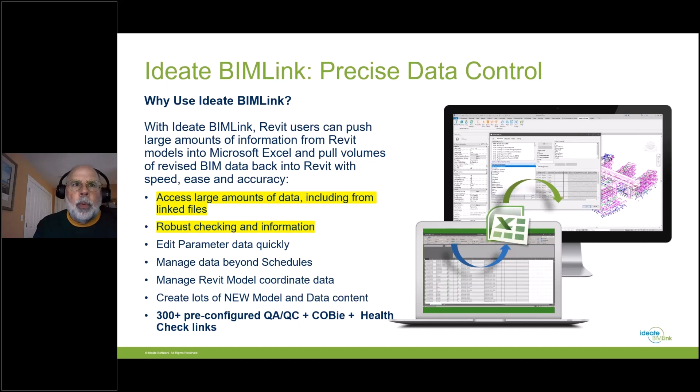So let's move right on to the products. Today we're going to be focusing on Revit model health and data management. Our first solution is called Ideate BIM Link. BIM Link supports many workflows, but today I'm really going to be talking about the highlighted ones here: robust checking and information and large amounts of data. We ship with multiple link definitions that allow you to extract information from the Revit model.

So here I'm going to go ahead and start Ideate BIM Link. This happens to be Revit 2023, but we support multiple Revit versions. When I select new, I have a series of link definitions that are already defined. In this case, I'm going to select from the health check folder. I've got something called HC views. These properties about the views, for instance the view template, the view count, the schedule type, are already predefined. I'm now going to export that out to an Excel worksheet that we also include with Ideate BIM Link, called our health check file.

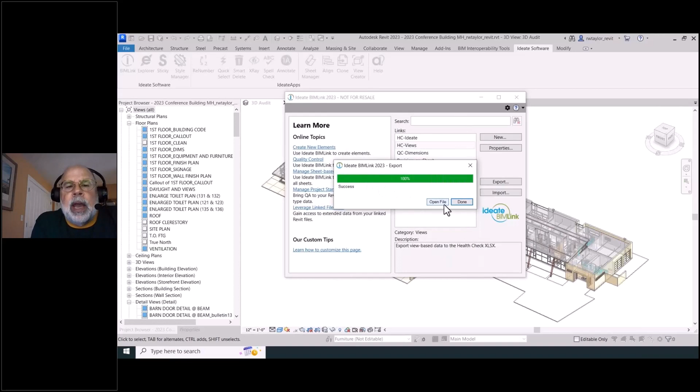So I'm going to export that. You can see now I can open up the file. I have what I call the raw data from Ideate BIM Link that's been exported: the view name, the title on sheet, the view template, all those parameters we talked about. But we also create a summary. Using pivot tables within Excel, we create a nice summary of all the different views and view types. We're going to see how this Excel folder can actually be expanded on with Ideate Automation.

For the time being, though, right now I want to show you just some editing. I'm going to hide some of the columns here that I don't need. Column D is the view name, and I'm going to use another column here, basically AT, and create a formula in Excel. That's the great thing about Excel, is I can concatenate data, I can add information. So I basically say I want this to be uppercase, all of the view names, and I want it to have a prefix of CONF for conference. Once I get the formula the way I want, I can basically use Excel to pull down the data, and then I'm going to apply the values to column D, which is the live BIM Link data, or the raw data from BIM Link.

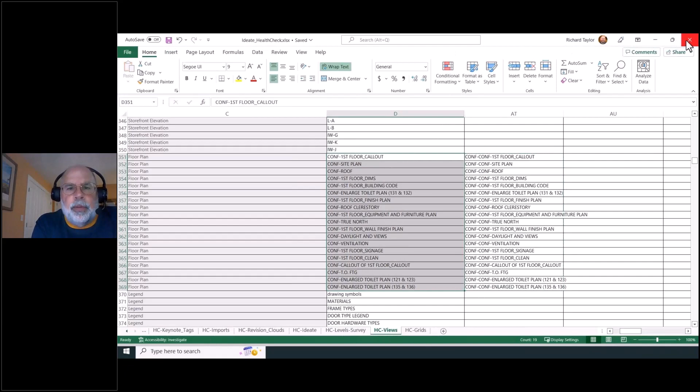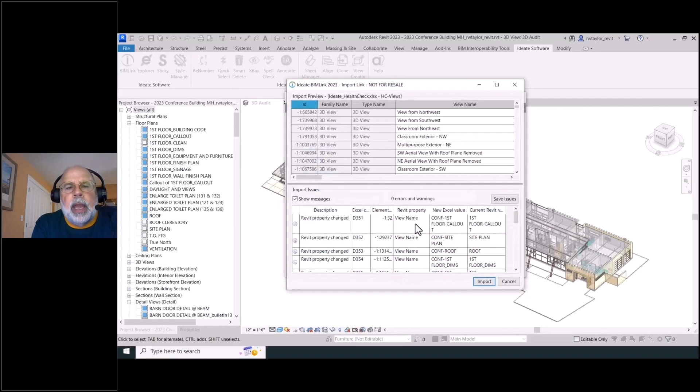Now that I have updated column D, I'm going to do the reverse process, which is basically take the health check Excel file and take that tab, which is the view tab, and import the data. So I'm going to import that from HC health check views, and I'm importing it, and now the information has been updated. So notice over on the project browser now, all of the plan views have been updated to be uppercase, as well as have a prefix of CONF. So I just wanted to show you a quick round trip example using Ideate BIM Link. And again, we're going to expand on that in a moment.

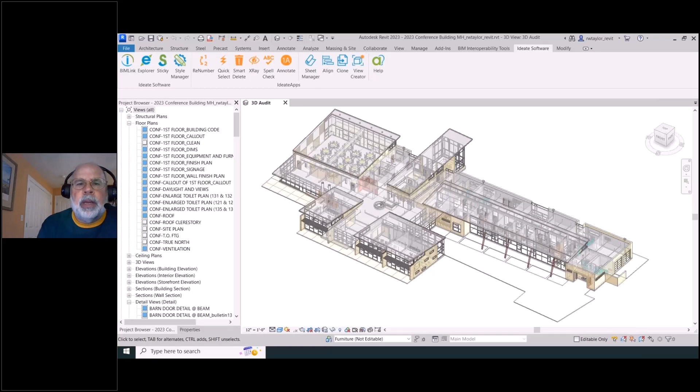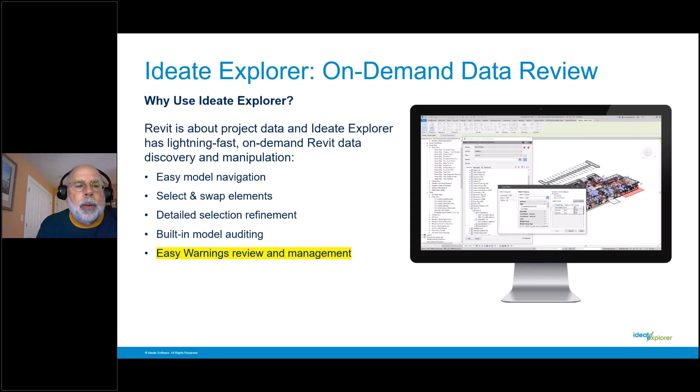Our next solution is called Ideate Explorer. As I mentioned, it's our model browser. There are so many workflows, but I don't have time to explain all of them, so I want to talk about warnings. Ideate Explorer allows you to review every single element in the Revit model, but it also allows you to review warnings. This is critical for a health check. When we do automation, we're going to be using the data here.

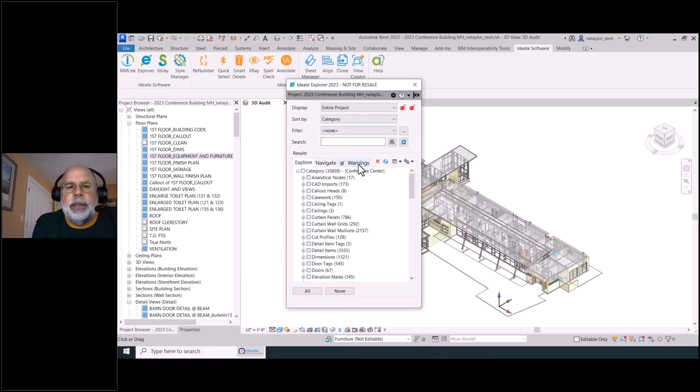So I just wanted to show you that you can switch over here to the entire project. You can look at the warnings tab, and this is going to show you the warnings, whether they're ranked high, medium, or low. You can also choose to have a warnings threshold, which we're going to talk about also on the health check. So I basically said that this file is allowed one megabyte, or one warning per one megabyte of file.

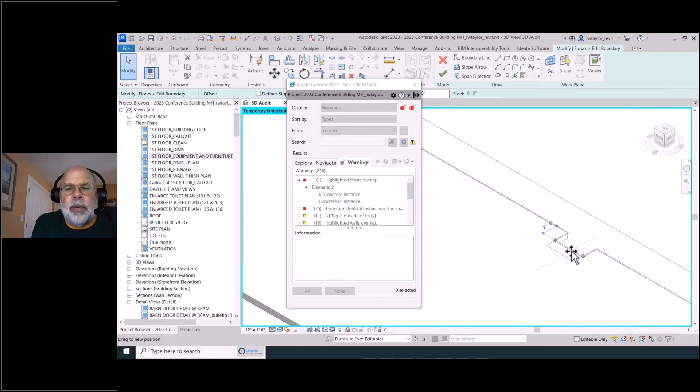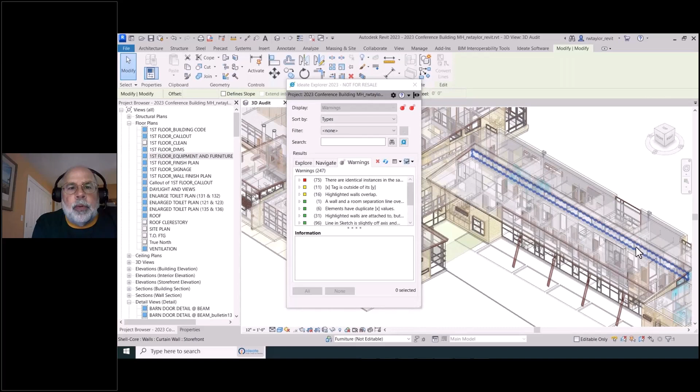But in this case, I'm just using the interactive tools within Revit to be able to highlight the two floor slabs that conflict, and then I'm going to change their boundaries so they're not conflicting anymore, and then that is no longer a Revit warning. That warning has gone away within my dialog here. So Ideate Explorer allows you to review those warnings and be able to fix them very easily.

Ideate Apps, as I said, is primarily productivity and efficiency, but there's a new tool that we just introduced in June called Ideate Annotate. Ideate Annotate allows you to review and check annotations on sheets and views.

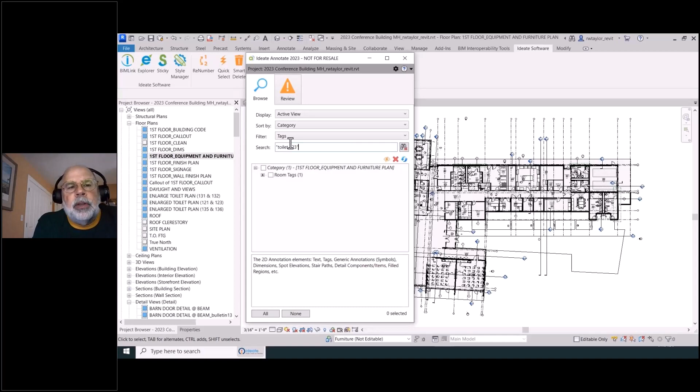So if I go to the Ideate Annotate tool here, similar to what you just saw with Ideate Explorer, I can browse elements, but in this case I'm only browsing 2D annotative elements on the view, or I could say the entire sheet or a number of views and sheets. I'm going to search for a particular tag, the toilet 123, and there's the room tag.

I can double click and go right to the view that contains that particular tag, so I can review or browse the information. And I think the bigger task at hand is to review clashes.

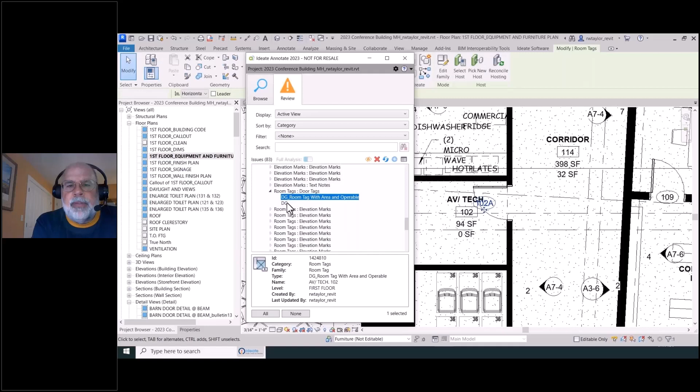You see that I actually have 83 issues, and there's a number of 2D elements that clash with each other. For instance, this room tag and this door tag - you can see the AV tech is on top of the door tag. So now I might want to move the door tag over to the right so that there is not a conflict. Then I'm going to refresh my issues list, and the issues will go from 83 down to 82, and I can continue to review information.

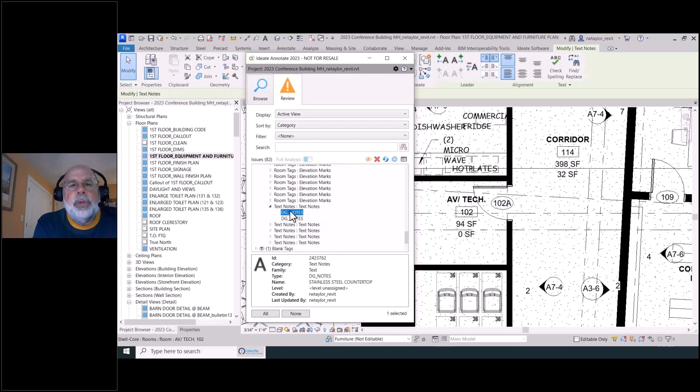I've got another tag here. If I go to my text notes, I've got two notes on top of one another, because they're looking at the bounding box here - there's the double acting door and the stainless steel. But in this particular case, it's okay. I want to dismiss that issue because they're close enough, but they're not really conflicting.

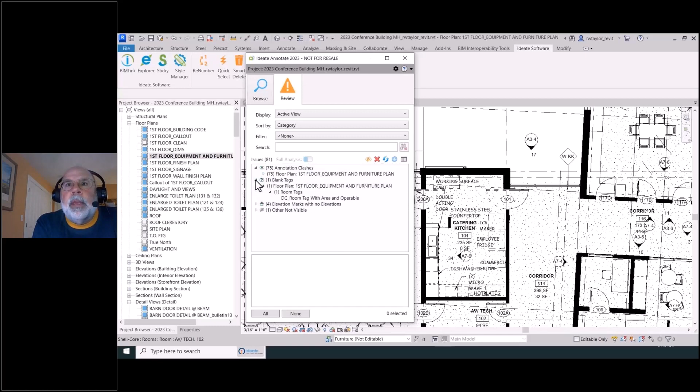So I have the control of being able to set the limit for the clash detection, whether there are more or less clashes, as well as being able to fix these or say that they're not an issue.

Other types of things, like what I just did there was an empty view tag or empty room tag, and it was outside of the room - I wanted to place that in the room. There are elevation marks that have no elevations, or zero length dimensions. So there's a number of things that the Ideate Annotate is showing me as far as issues.

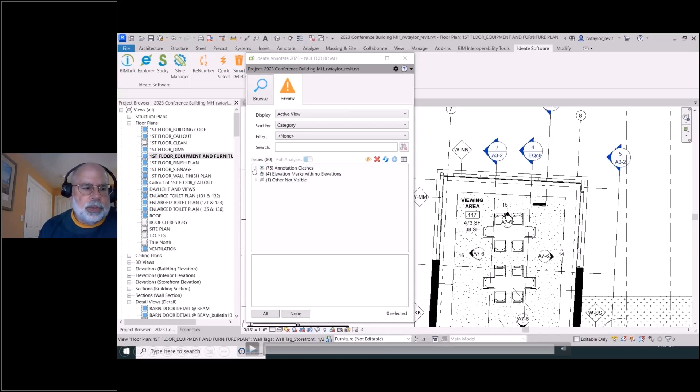And that's going to be important when we talk about Ideate Automation in a second. So what I've done is queued up real quickly Ideate BIM Link, Ideate Explorer, and Ideate Annotate, which is part of the Ideate Apps, and I showed how you can interactively use them within Revit.

But Ideate Automation comes into play now when we can actually take those workflows and automate them. So Ideate Automation is a fairly new solution from Ideate Software. It's a scripting solution that allows us to take workflows from Ideate BIM Link, Ideate Explorer, Ideate Apps, as well as Ideate Style Manager, and allows you to automate those so they can be replicated again and again.

And in fact, some of the scripts do not require Ideate Software, for instance publishing PDF information, or maybe publishing a list of all of the families and the size of the families within the model.

So Ideate Automation is a separate application. As you may notice from the ribbon that I'm showing, it's not part of the ribbon because it's not inside of Revit - actually it's going to kick off Revit and run the script. So it's our first desktop solution as opposed to integrated inside of Revit, and it also, like our other solutions, supports Revit 2020 through Revit 2023.

So why should we use automation? As I said, it allows you to save time by automating repetitive tasks, and you can also run those tasks in the evening. You can use the Windows Task Scheduler to schedule those tasks at a convenient time.

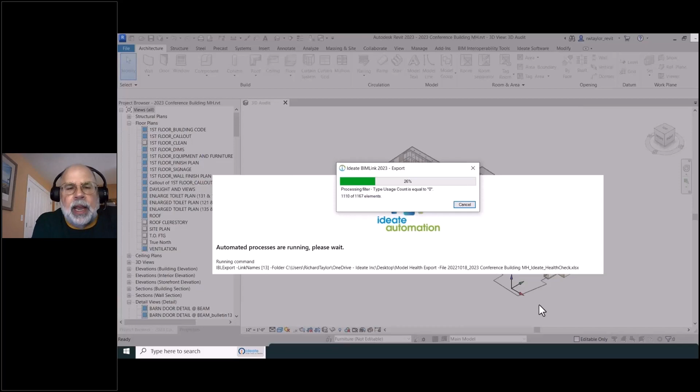It's going to kick off Revit, in this case the appropriate version, Revit 2023. And it's going to then not only extract the information like you saw me do in BIM Link - I did the HC-views link definition and exported that to Excel - well, it's going to export about 13 different link definitions to that Excel file.

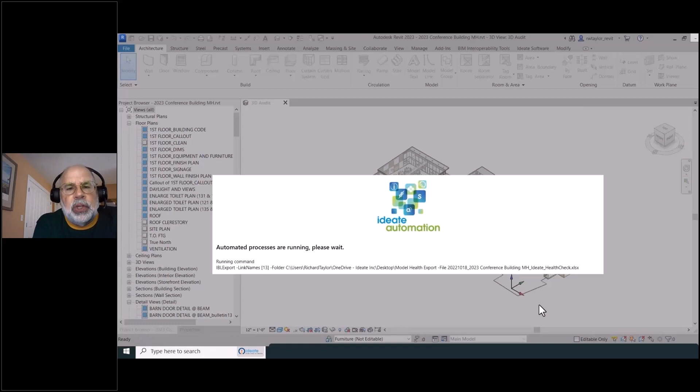It's also going to export the warnings data that you saw in Ideate Explorer, and it's going to export the Ideate Annotate data that you saw when I was showing you the sheets and the issues. So all of this is being extracted to one Excel file, our health check Excel file.

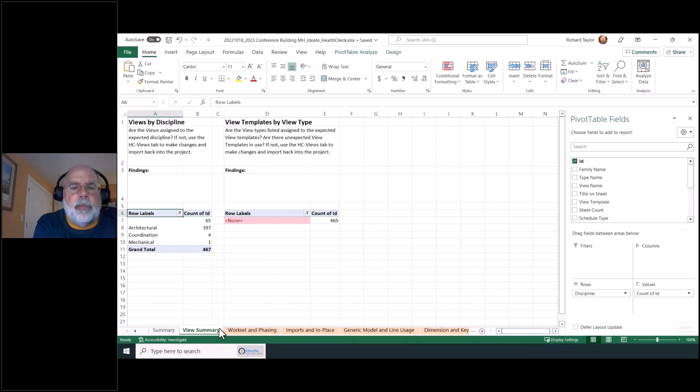This is included with Ideate Automation. It's a little bit more robust than the one I showed that was included with Ideate BIM Link. You see there's summary information here, just like I showed you before - summary of the categories and the information. We have a view summary, work sets and phasing, imports and in-place families. All of this information was just extracted from that Revit model.

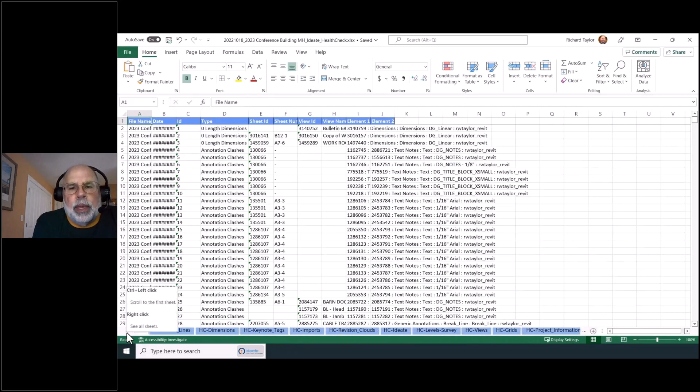If I move over here to the right, you can see everything in blue is extracted from Ideate BIM Link, everything in green was from Ideate Explorer, and everything in orange was from Ideate Annotate. So the raw data from those products was basically combined into this health check spreadsheet that has a nice dashboard for you to use.

Each of us has a very limited time today, so I wanted to make sure I gave you a nice overview of some of the new health check and data management auditing features of Ideate Software.

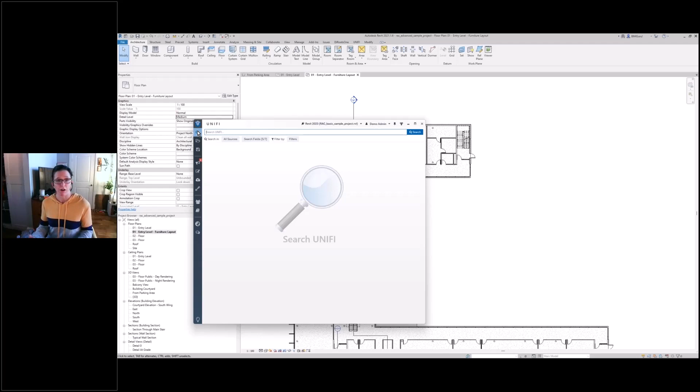Now for everyone else, they just land right here on search. This functions very much like you'd expect, where I can start looking for content. I've got a project here that's a bit of an office layout, so I want some workstations here. I'm going to go ahead and start looking for a workstation. And just like that, I've got results.

UNIFI is able to show preview images automatically with this content here, and preview images work across a variety of Revit families. So furniture systems I have here, I even have a schedule. So that does mean UNIFI isn't just storing those pieces of content you'd save on the file folder system, but a lot of content that tends to get harvested from past projects, such as schedules, drafting views, materials, fill patterns. We can even store all types of different sheets.

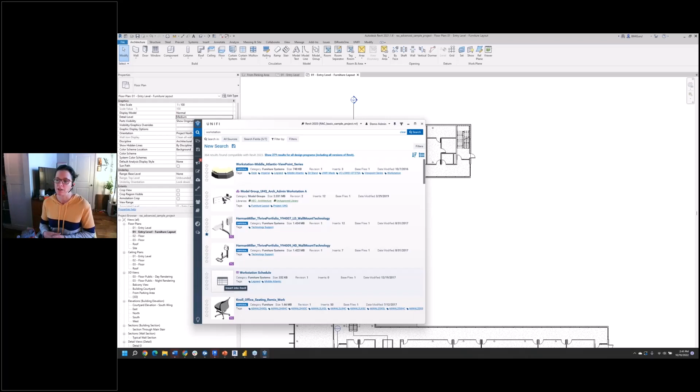Lots and lots here, and inserting content, even this workstation schedule, is as easy as just clicking on that icon to insert it. Now, I've actually inserted it into a different Revit model, one you can't see on the screen here, but if I drag and drop that over, you should be able to see it now.

Now, what I wanted to also give you a chance to see is that I did have multiple Revit programs open. So while this would make my BIM manager self kind of shudder, what we can do is connect to multiple Revit projects at the same time. And then inserting, we are actually looking for content across different versions of Revit even.

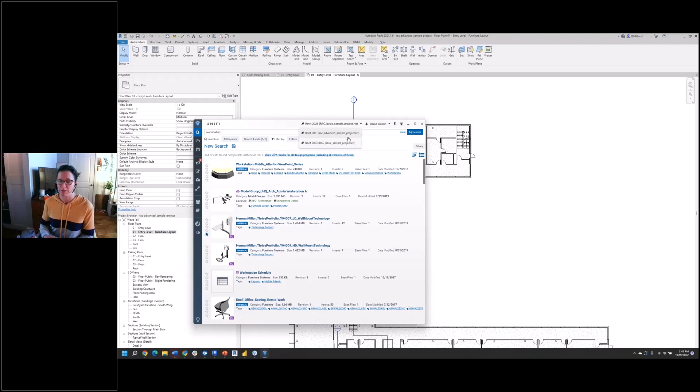One of the most powerful features of UNIFI is that when I click on the name of a piece of content - this one actually came from one of our manufacturer channels, I'll circle back to that - I'm able to view family types, parameter information, and best yet, my file history for this piece of content. This content has been around since 2012, but UNIFI is automatically upgrading it for you.

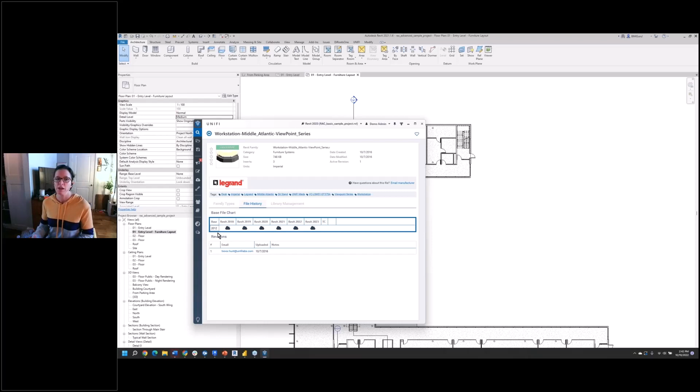So you no longer have to put content into different Revit file folders and have users manually navigate or take that time to script that out every year to copy those files from one version to another. As we speak about versioning, content doesn't always stay the same, of course.

So I'm going to go ahead and look for another piece of content here. I have just a few too many results, and I'm looking for something very specific. Notice the all sources that I have here - all sources, company libraries - it doesn't just stop there for us.

What we also have here is the ability to see content across shared libraries, so other customers with UNIFI subscriptions. This is great for a number of the owner clients we work with to communicate with their AORs, but we also have manufacturer content available.

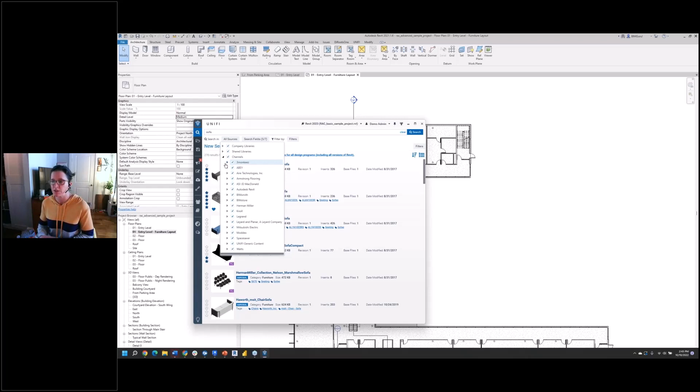All of this content comes from a vetted source - it all goes through our content audit, so more on that in just a few minutes. But we also provide all of that Revit content right out of the box for you. So if you're building up that library, you don't have to worry about transferring over content you may need - you could just go ahead and subscribe to it, and you're ready to work with UNIFI right out of the box.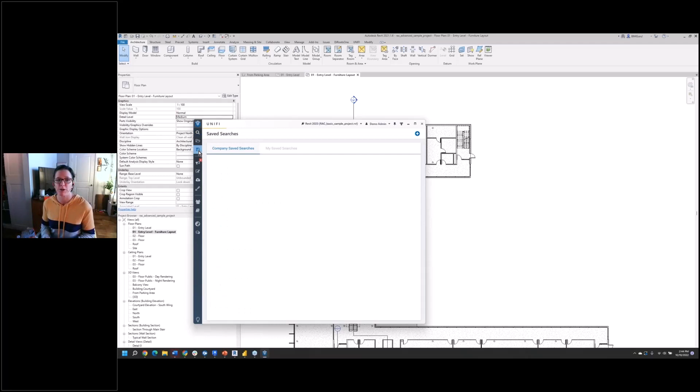A few other items I did want to make sure we talk about are the productivity enhancements of saved searches. Searching for content with a single term is easy enough, but search can get complex, especially if you're looking for content according to specific standards. Maybe you're also looking to just kick off a project more quickly.

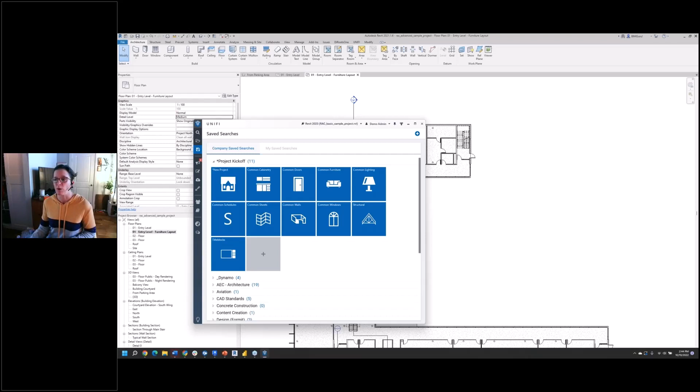With something like saved searches, I can go ahead and create a project kickoff set, where if I'm going to go after some common cabinetry, I can select that, and I've got everything I need in as few as 3 clicks.

With UNIFI, you saw how easy it is to insert with a single click, not too bad, but what if I know I need this piece of content, this piece, and that piece? Selecting all of that is just as easy as pushing Control, then I right click and I'm able to batch insert my content.

So you can see, real time, batch insert - it's going to go ahead and communicate with Revit, and then I'll be ready to insert that content. It does sometimes hang up a little, so I tend to have the patience of a 2-year-old - everybody who knows me well seems to know that - but I hit escape, go back to UNIFI, and I can batch insert that once again.

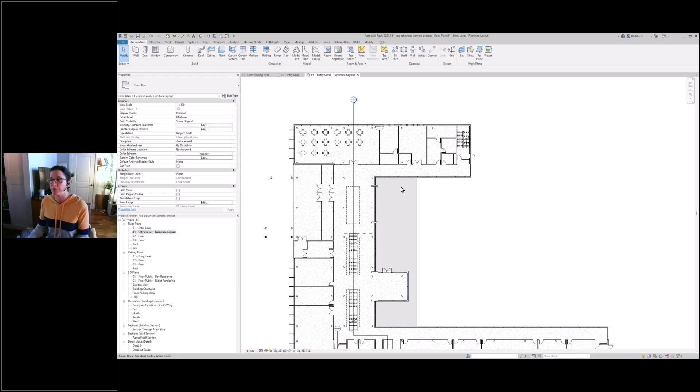Now, content, as I mentioned, isn't static. I mentioned a bit about our versioning capabilities, but what if you're not in charge of some content - maybe you're not fixing it or something along those lines? An end user can actually request an update to an existing piece of content.

This goes to any admins responsible for that library, and they'll be able to take it completely through the process. That also appears on the notifications page I started with, so I can simply double click to open up that requested file.

It's in progress, so somebody's already picked it up - those files and folders can be dragged right through here. The design documents are also attached, so nothing's more powerful than getting a preview image or spec sheet to convey that design intent or modification.

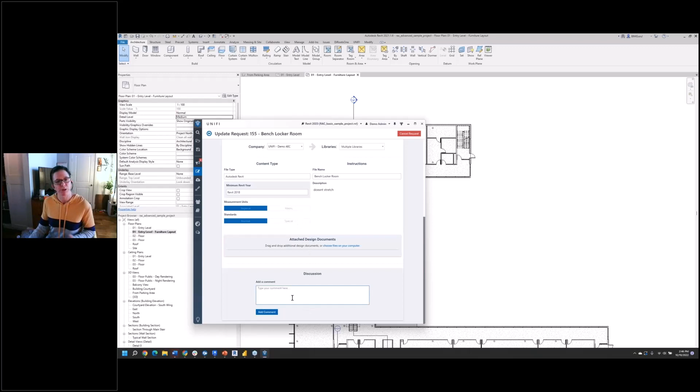In case there are any other questions, the discussion board is able to go ahead and communicate. Says, hey, I might be missing that spec sheet, for example, or can you tell me a little bit more about what you're specifically requiring? So again, all information is in one place.

For those of you that like to always track what they do, don't worry, because we never delete anything that's been completed or rejected over time. We just simply hide it from this view, so use that status filter. You can see items and, of course, change dates as needed. Works great, copy paste, but we are working on enhancements to things like content request, and I'll be giving you a few teasers right at the very end on that.

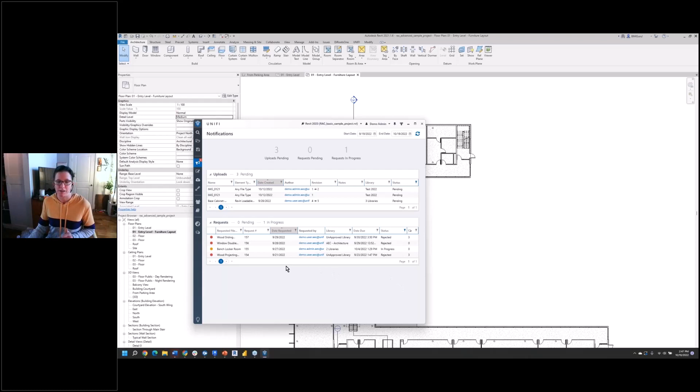All right, so back to now that I've survived the live demo, I'm going to go ahead and talk about a few other offerings we have.

One of those is project analytics. What's pretty cool about this is that it's reviewing live model data. Anytime a user syncs on a model that's been opted in — meaning we're not going to look at your data unless you tell us it's okay — we're going to be able to see things like particular Revit warnings, sync times, that minor version across Revit. One great thing Richard was talking about is being able to see those BIM 360 projects and what year they're in. We'll be able to take a look at that specific minor version, and for BIM 360 projects, that's really, really going to be critical.

The compare changes feature is also pretty powerful. So if you ever are wondering, hey, who deleted a whole bunch of drafting views? It happened about this time. We'll just simply hop into the project analytics portal and you'll be able to check that out.

Now, project health does start with the quality of the content itself. I alluded to this a little bit when I spoke briefly about the manufacturer content we offer here, but with our content audit, we can provide that same service for you. This is going to be collecting data about families — everything from imported CAD, file size, parameter data, type information. So the best way to do this is to once again torture myself with a live demo.